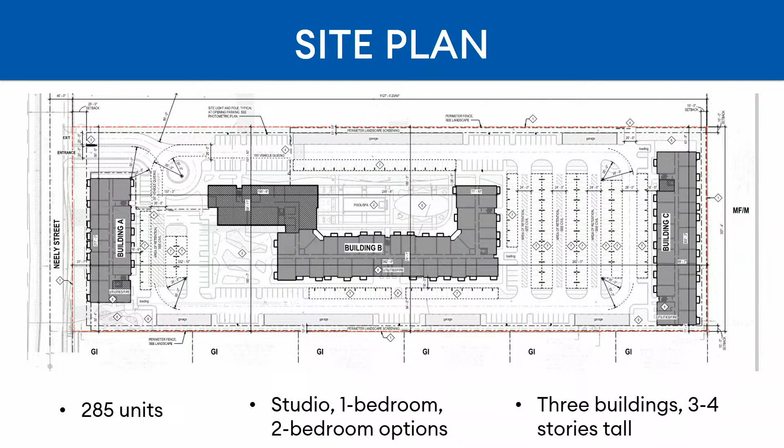The proposed emergency secondary access route is still being finalized, but as currently proposed will be placed at the northeast corner of the site and travel along the eastern boundary of the future town-owned property until it reaches Vaughn Avenue. From there, it will curve up and around the district lofts community and exit out onto Ash Street. This access point will be for emergency vehicles only and will likely only be utilized if Neely Street is blocked due to an emergency.

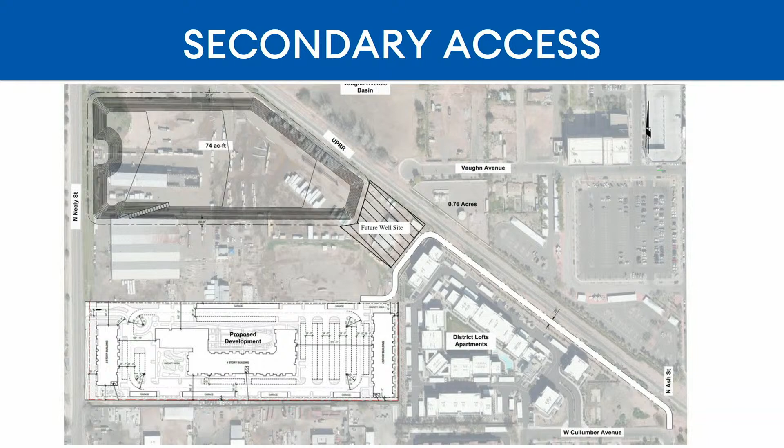The open space requirement for multifamily high is 40%, but a planned area development was approved in May, allowing the open space to be reduced to 35%. The applicant is currently proposing 35.3% open space.

Landscaping will include a buffer of trees along the perimeter of the site. The types of trees include, but are not limited to, ghost gum, fruitless olive, palo verde, evergreen elm, and southern live oak. Also found on site will be a variety of shrubs and ground cover, such as bluebells, Mexican honeysuckle, orange jubilee, pink oleander, lantana, deergrass, and red and blue yucca.

The buildings are designed in a modern aesthetic with materials complementary to the adjacent Heritage District. Staff does have a handful of concerns that affect all of the buildings. These concerns have already been discussed with the applicant, and they were received positively for the most part. As a summary, our first concern was the exposed downspouts that will need to be internalized.

Another concern regards the flat nature of the roofline. Staff has requested some variation in the roofline heights, but the applicant has expressed concern with modifying the roofline because the flat nature fits the more modern aesthetic look they're going for. We ask that if you have any specific feedback or suggestions on how to proceed with the roofline concerns, please provide that this evening.

The next general concern we have is about the balconies. As proposed, they look like an afterthought. We've requested that they be incorporated into the building design in a more thoughtful manner. The balconies will also need to be covered as required by the Land Development Code. Staff has suggested that perhaps some of them can be recessed into the building to assist with covering them and also provide some additional dimension to the buildings. The last concern we have is about the continuity of the materials, which I will touch on over the next few slides.

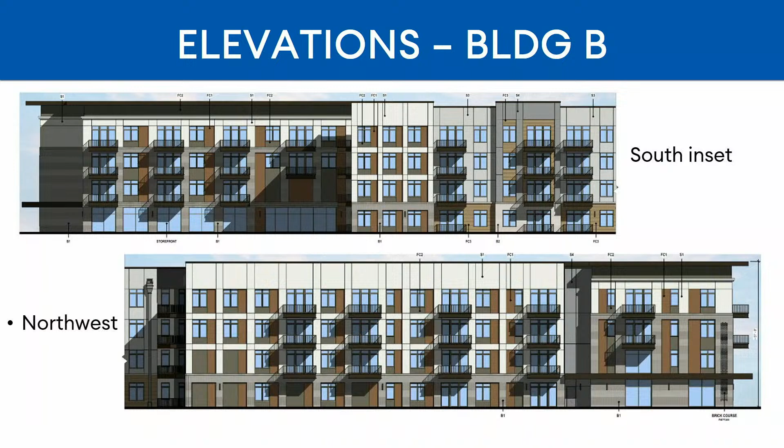These images show a closer look at the northwestern section of the building. The top pictures show the western portion of the south elevation, and the bottom shows the western portion of the north elevation. These are close-ups of the dotted areas here that are grayed out.

With the exception of the ground floor, staff has requested that the quality of the elevations be consistent and not to remove materials just because they face internal to the site. The north elevation will be seen every day by residents who live here and spend time at the pool and amenity areas. The building is also 4 stories tall, and those upper floors will be seen by neighboring areas.

Building C is the rearmost building adjacent to District Lofts. The use of brick has been eliminated almost completely on this building, and we have requested that additional colors and materials be added to the building so that it has the same character level as the other buildings on the site. This building directly faces the District Lofts community and should include more material variation so the neighboring properties aren't looking at 3 floors of stucco.

Right, and seen here are the end caps of that Building C, an image of the proposed garages found on the north and south sides of the property, and also an image of the proposed monument sign for the community.

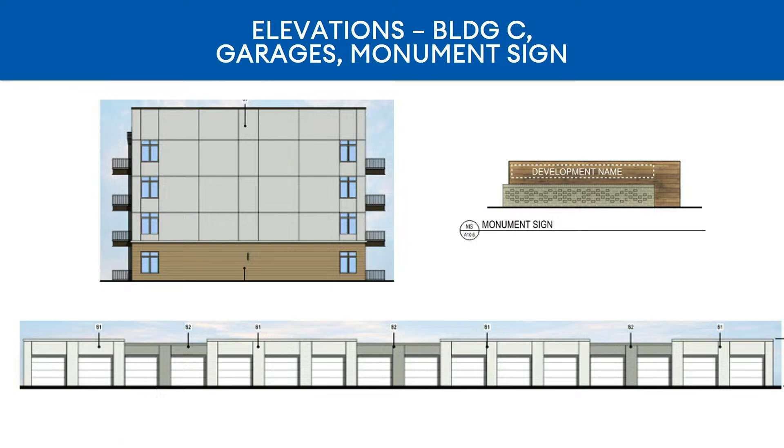Right, and these are just some images of Building A's floor plan. That's the building closest to Neely Street. The first floor is on the left and the second and third floor is on the right. You can see the entry points on the east elevation.

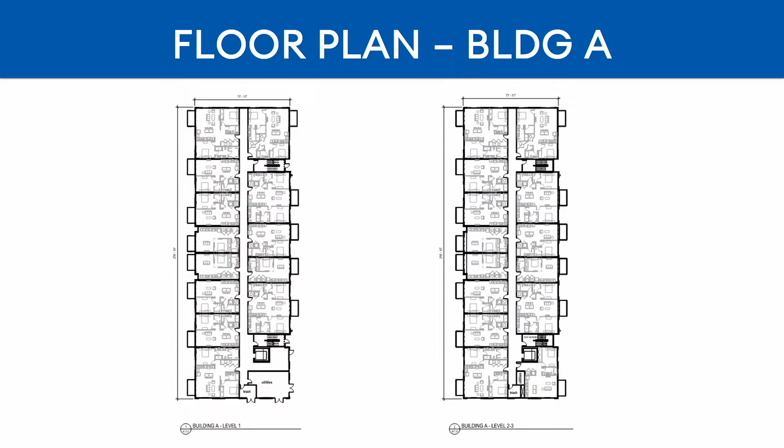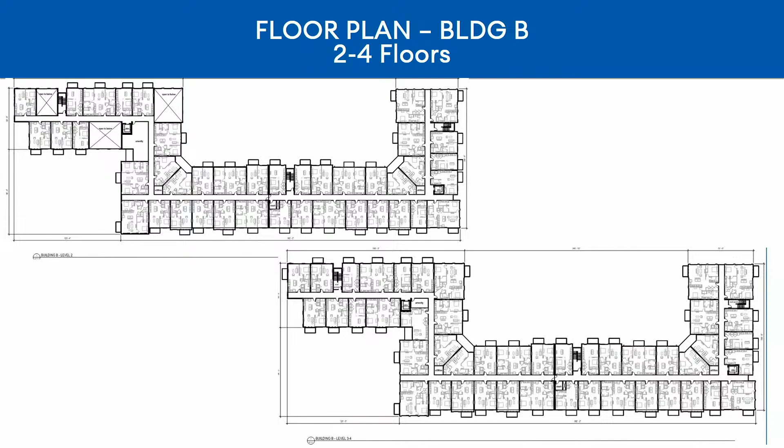This slide shows the floor plans for the upper levels of Building B, with the second floor being shown on the top and floors 3 and 4 on the bottom.

Lastly, I have a few snips of the proposed bedroom options. 20% of the units will be studios, 31% will be 2 bedrooms, and the remainder will be a mix of corner and standard 1-bedroom units.

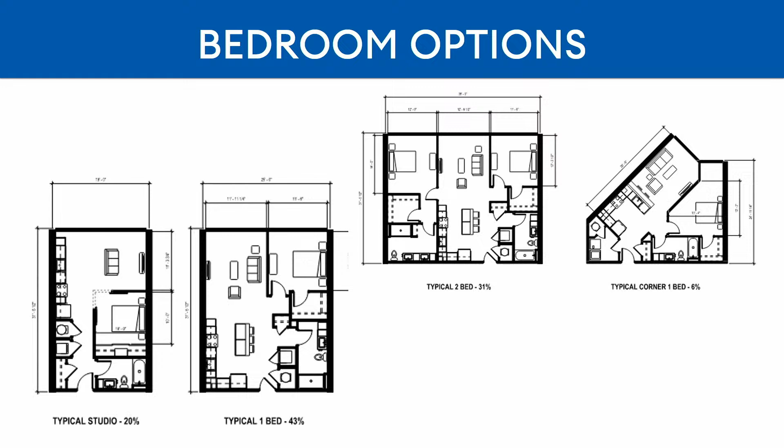And with that, I am seeking your input tonight on the elevations, including the roofline variation and any other general feedback that you would like to provide.

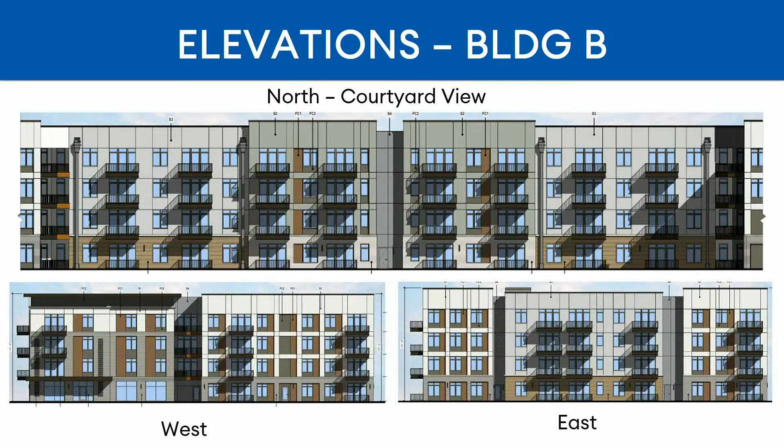Okay, so the concern is at the elevation, having that very consistent line. Yes. Thank you, okay, I understand. I was maybe too literal then with that.

So we're just looking for some more movement, possibly something to help it just not be so flat. Sure, yeah, and I think if you're also requesting variation in finishes and material and colors, I think there might be able to have some play there.

Bringing in different colors and keeping it the same could give it a different appearance, but if all of these conversations are kind of happening in tandem—yeah, I love lines and I love straight lines, so I don't have a concern with it.

Vice Chair Updike, we did take this to Planning Commission study session as well, and I'm sorry I didn't include a slide on their feedback, I should have. But they were kind of on the fence about the roofline as well. The roofline concern is coming more from a staff perspective. Planning Commission weren't overly concerned with the way the building roofline looks currently.

Okay, all right, thank you, Vice Chair Updike. Commissioner Bigelow or Commissioner Clausen, do you have any questions or comments?

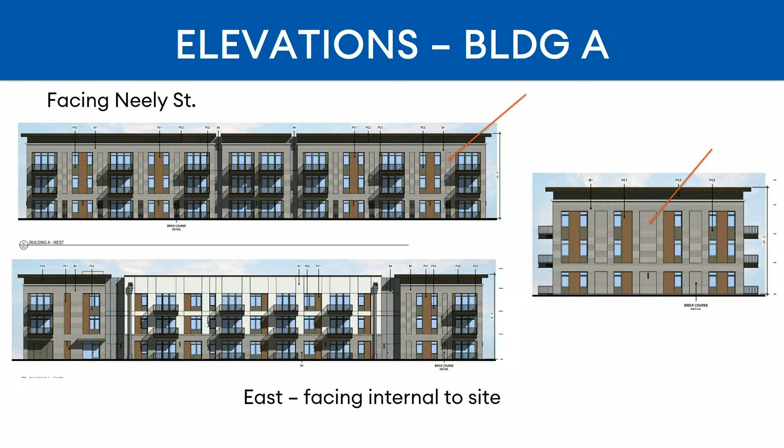Yeah, I think. And then, so in addition to the patios, can you go to the detail on some of the finishes, the detailed finish sample?

Oops. This one? Yeah, perfect. That's kind of what I was wanting to look at.

Fiber cement panels go both horizontally and vertically in some locations. Got it. Yeah, I think as a rule of thumb...

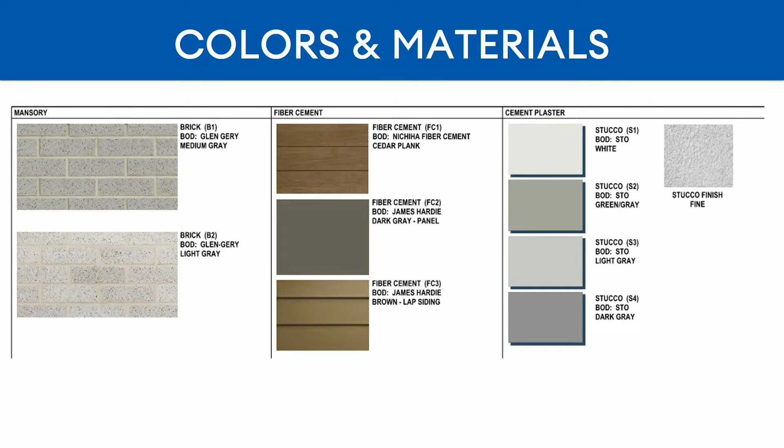I do think it comes across a bit uninteresting, and I can't necessarily put my finger on it, but I do think the patios are a big part of it. I'd love to see some shade structure over the patio spaces. As you had said, it could be created naturally by setting it back into the building, or it could be done in an interesting way with eyebrows or awnings.

Don't get me wrong, not like a fabric material, more of a permanent awning, a stainless or steel structure, not a fabric structure, but eyebrows - interesting features that could be added to add shade.

I think it'd be great to see maybe a little bit more iron and glass on the building. And then, with some changes, I am far less concerned about the horizontal nature of the roof line.

Great, thank you. Thank you, Commissioner Clausen. Commissioner Bigelow, do you have any comments or questions? Yeah, I do. So I also appreciate this study session being strictly on the design of it, because I feel like that is kind of what our job is.

And just to make sure that things are consistent within the district and the surrounding buildings, I think we could maybe solve a few of these problems at the same time.

It is kind of a lot, but if you could go to the elevation titled General Elevation, where it has the concerns - this one's perfect. So right here, you said 210 feet is the length of this, and this is what's going to be facing Neely in the top left, is that correct? Correct. So it's approximately 200, 220-ish, somewhere right around there.

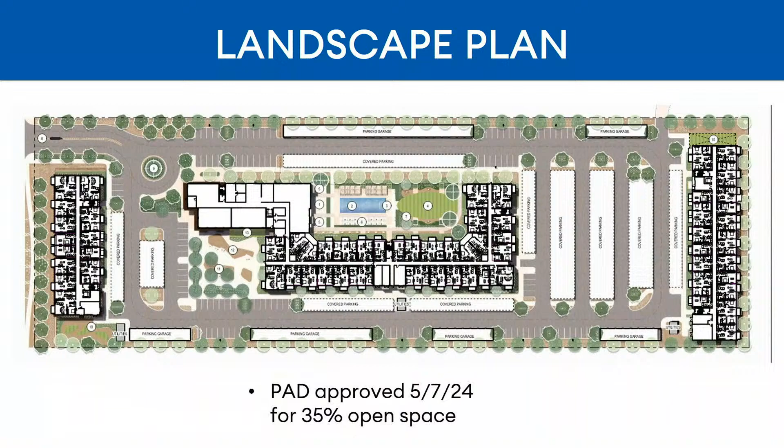Okay, I don't think I have any further questions. Any commissioners have any further questions or comments?

Yeah, I've got one. Just to echo Commissioner Bigelow, I think they could do something unique in between the downspouts there that could address the roof line. But I would also like to see, speaking of District Lofts, if you look at that project, the multiple buildings they have there, some of those buildings have a completely unique identity from the building immediately next to it. I think in addition to doing something in between those downspouts to set off the roof line, you could completely change the material and facade of that center section, and it will visually almost appear as three separate buildings.

Giving it just a more interesting curb appeal, so your eye doesn't just look left to right, horizontally, and say the exact same scheme. I think you could, in a unique way, help solve the solution on, as staff has recommended, putting those downspouts internal, refacading that centerpiece, if you will, of that building, which could be a theme throughout the project. That could also help solve the solution of putting those downspouts internal. But setting off that center section, I think, could go a long way, in addition to Commissioner Bigelow's idea on the roof line.

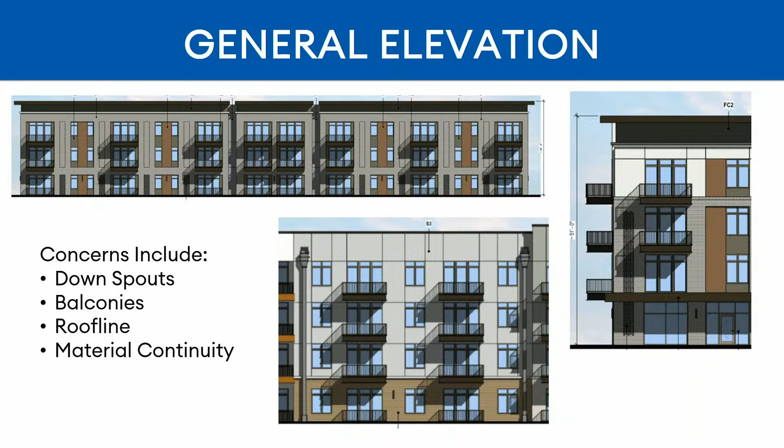And Commissioner Clausen, I agree with you, and talking about that made me think of Hale Theatre and what a fabulous job they did for it, being one building and one use, but making it look multi-dimensional using different materials. I really don't have a problem with the smooth stucco. I know the reason they want to use it is because it's significantly cheaper than brick, block, and siding. But I feel like if they come with a really good design to make it look more broken up and more like separate buildings, even though on the interior they're identical, having it broken up that way could make sense to implement block, brick, and stucco into the project. But just having the whole outside all the same, with a bunch of balconies and windows, almost like cookie cutters, just copying and pasting, doesn't look as good as I feel it should or could. So, completely agree. That's my point.

Again, this is DR 23-109. This is an amendment to the original case, DR 20-48. As you know, this project is located at the southwest corner of Juniper Avenue and Gilbert Road at the north end of our Heritage District. We call this our North Anchor site, also Heritage Park or Heritage North, so you may have heard it by any of those names. Just by way of background, the total site is 11.97 gross acres or 9.9 net acres.

It was originally approved by the Redevelopment Commission in February of 2022. Since that time, there's been some additional activity and work that the applicant has been doing with staff, working with SRP. And back in April of 2024, Town Council approved an amendment to their PAD that allowed the development to be constructed in phases.

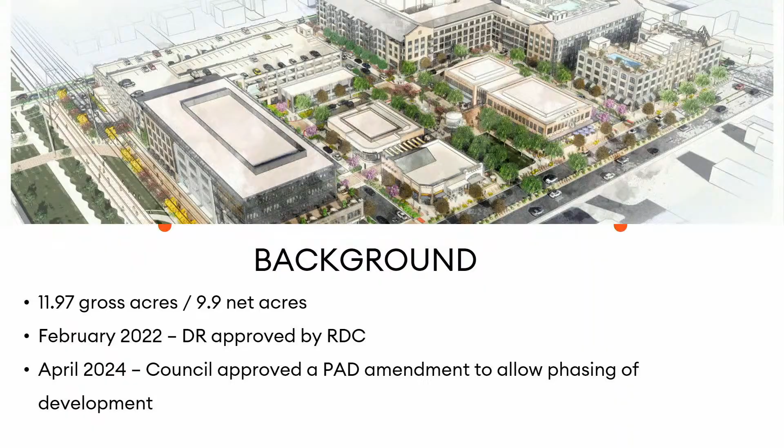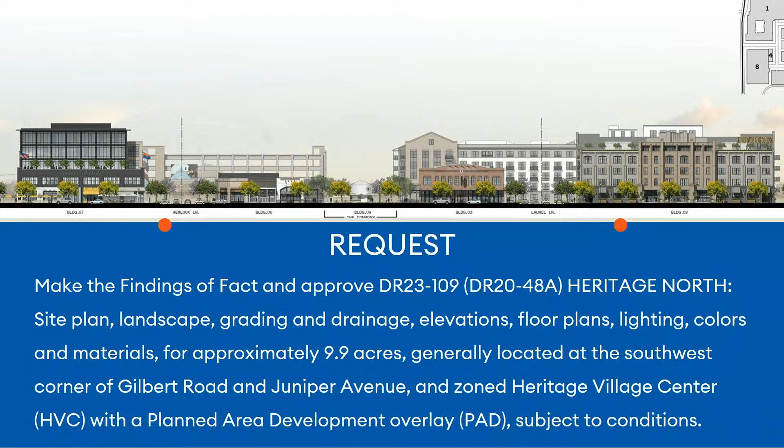So that's what we're here before you tonight to present, that phasing plan, because that is a departure from what you had previously seen, which anticipated that it would be constructed in a single phase. So tonight we're asking the Redevelopment Commission to approve DR 23-109, which will allow phasing of this development, as well as a couple other modifications that I'll cover throughout the presentation.

Just to reorient you to the site plan, this is the master site plan and what the site will look like at full build out. There are a total of 9 buildings. It includes the commons open space at the center of the site, the full construction of Water Tower Way through the site, and improvements to the Western Power Line Trail.

Just to quickly run through the buildings: the large building at the northwest corner of the site is the multifamily building, which wraps a parking garage that will serve those multifamily residents. Building 2, at the hard corner of the intersection, is the hotel building. Building 3 is a 2-story retail office building. Buildings 4, 5, and 6 at the center of the site are additional retail buildings that are single story. Building 7, at the very south end of the site on the eastern side against Gilbert Road, is a multi-story office building with retail on the bottom. Building 8 is that parking garage, and at the center of the site there's a small kiosk as part of the commons open space.

So this is full build out of the site. It includes those 2 parking garages as I mentioned.

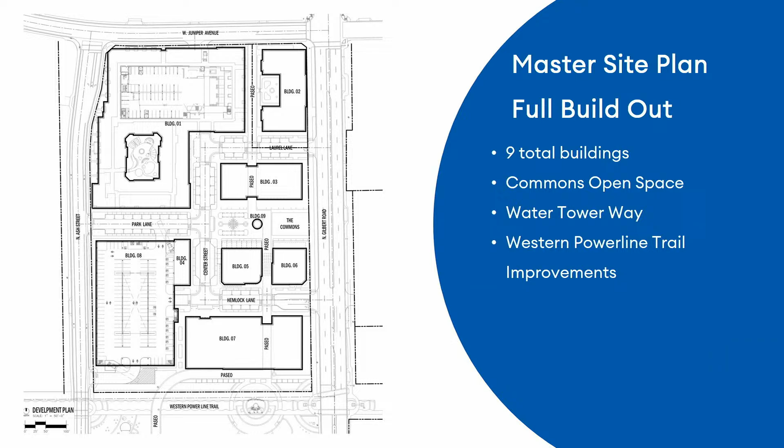What the applicant received approval for, their PAD amendment included this proposal that would allow phasing of the site. So it includes construction of the multifamily building, including that multifamily garage, buildings 3, 5, and 6, the commons open space, Water Tower Way throughout the site, building 9, and then the most significant change you'll see on this plan compared to the last is that surface parking lot. This is anticipated to be a temporary surface parking lot while they work towards build out of those sites, and then the next piece that would be built is that office building and the second parking garage.

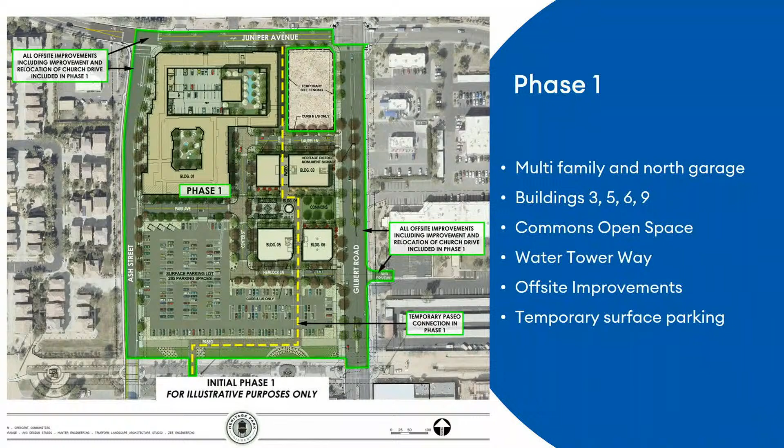The hotel, it's important to note, could come in sooner along with phase 1, just depending on finding a user for that site. So phase 2 would then round out the construction of the site with building 4, building 7, that office building, and then the south parking garage.

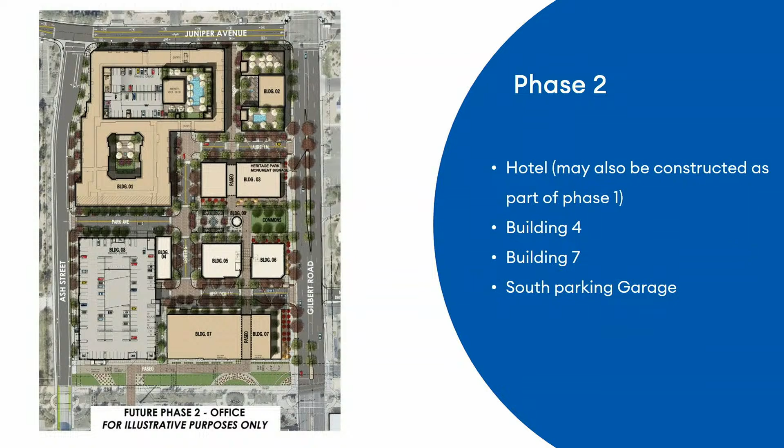It's important to talk a little bit about parking. There are no changes to the overall parking of the site at full build out. Per the previously approved design review and their parking AUP, they're required to provide 1,272 spaces, and they will still meet that requirement at full build out. For phase 1, for all of the uses they're building, they're required to provide 645 spaces. The surface lot will bring them to 782, so they will be meeting the parking requirement for that initial phase.

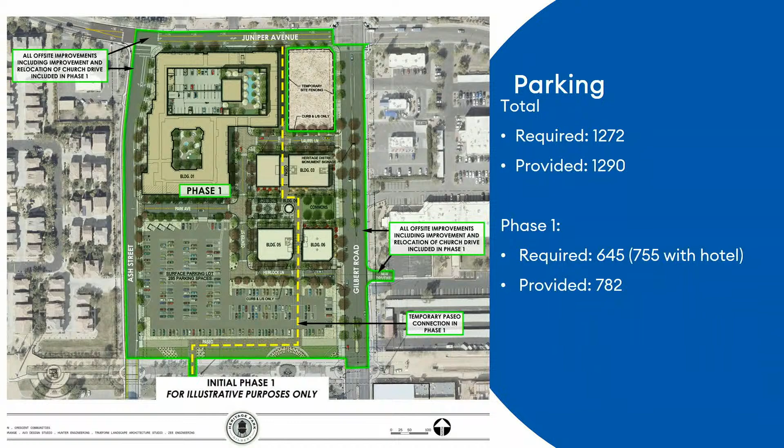I also wanted to talk about a couple of the changes you've seen in your packet regarding the elevations. Had these come in on their own, they likely would have been processed as administrative applications, but because we had this one to bring to you to talk about phasing, we've included them in your packet as well for consideration. Building 3 is that 2-story building that I talked about.

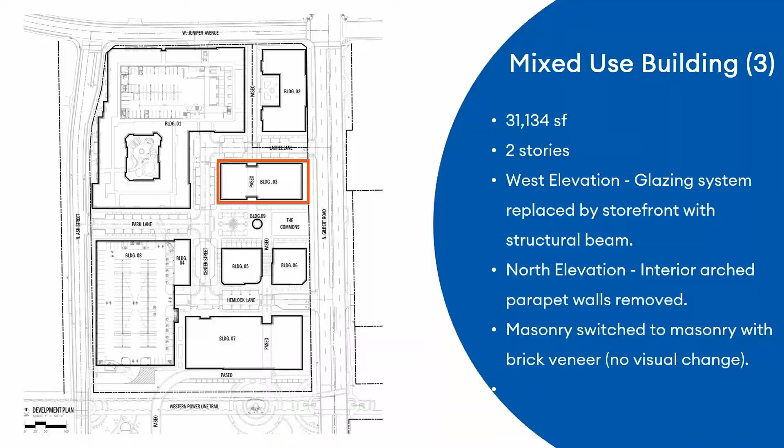It's 31,000 square feet, no change to that 2-story building. What they've changed is some of the glazing systems—they've replaced some of those with a structural beam. On the north elevation, they had an interior arch parapet wall that was removed, and they changed some of the masonry to masonry veneer. So these look very, very similar to what you had seen previously, but we wanted you to take a look at those.

The materials, again, the only change is swapping out that masonry brick to a brick veneer.

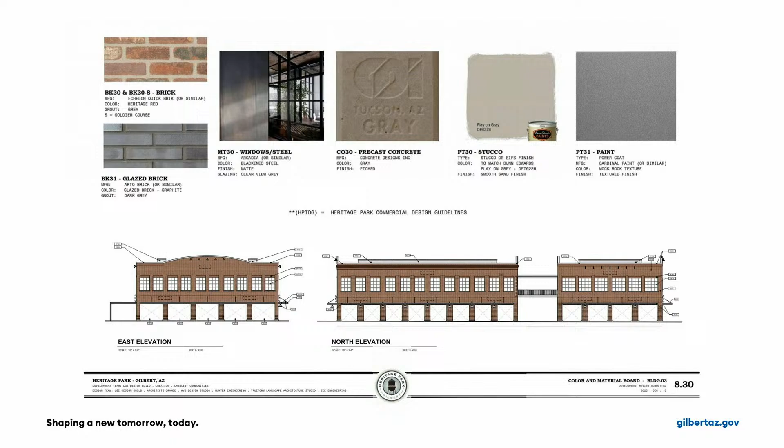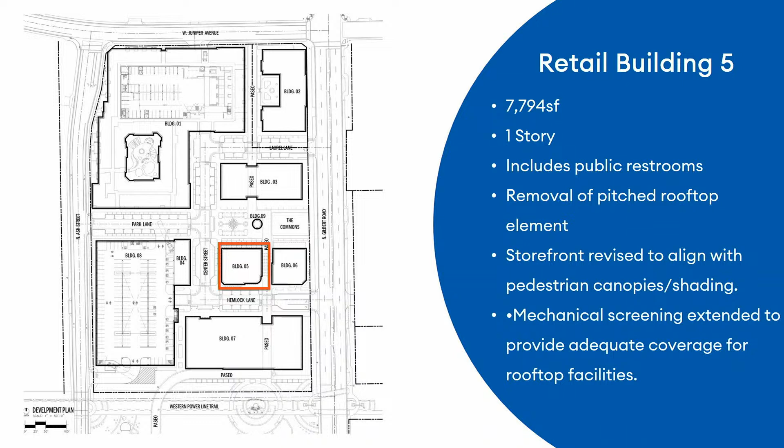With retail building number 5, this one is more central to the site. This is a 7,700 square foot single-story building that includes the public restrooms, which will still be part of this structure. They did remove the pitched roof element with these elevations, modified the storefront to better align with the pedestrian environment, and brought the canopies down a little bit lower. They also extended the mechanical screening. So these are the new elevations for that building—looks very similar to the original approval.

And then with retail building 6, this is a 6,700 square foot building, single story. Again, they made some of those similar revisions to the storefronts to align the canopies better for pedestrians. On the west elevation, they updated the electrical service room, and then updated the pedestrian canopy on the southern facade of this building.

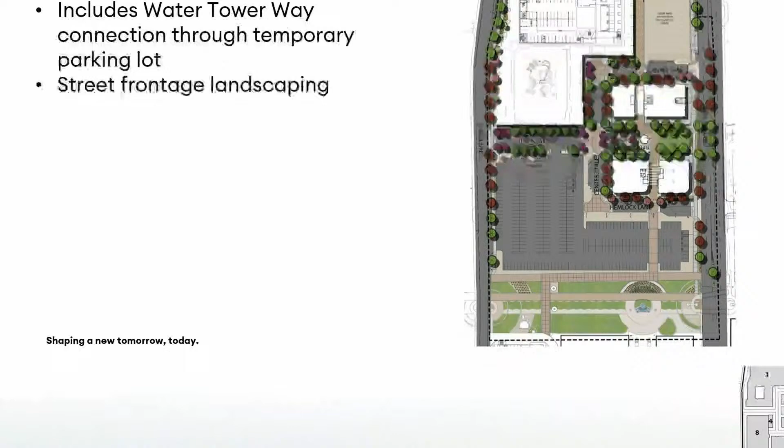Staff is happy to answer any questions you have about this application. Staff does recommend approval.

I'm sorry, Sydney. You are welcome to ask the applicant any questions—they're here tonight as well. And then there are the two use permit applications that accompany this as well. So if you'd like to make your decision on this one, you can, or I can roll right into the use permits.

Thank you, Ashley. Any commissioners have questions for staff?

I do, because I think approving this kind of goes hand in hand with the special use permits. I just wanted to know if SRP was the only major holdup between now and this project being approved back in February 2022. Just to make sure I understand that question, are you asking if the delay was primarily the work the applicant needed to do with SRP? Yes. The applicant may be able to shed some additional light on that, but that was a big hurdle the applicant needed to work through—coming to resolution with SRP on what they could and could not do within that easement. I don't know if there are some additional factors they may know of, but that was a big hurdle.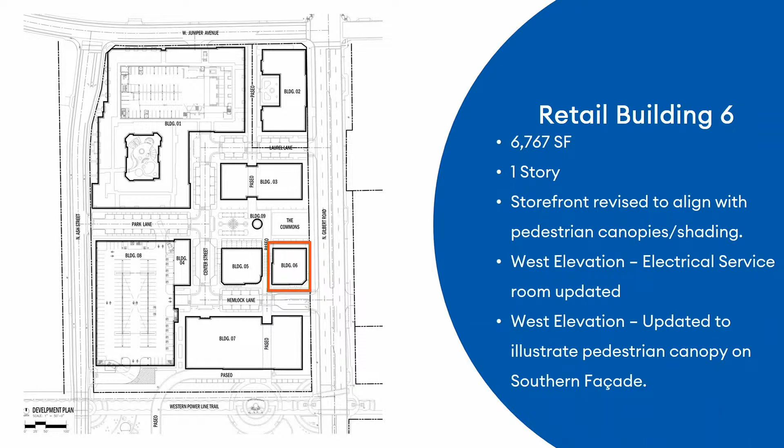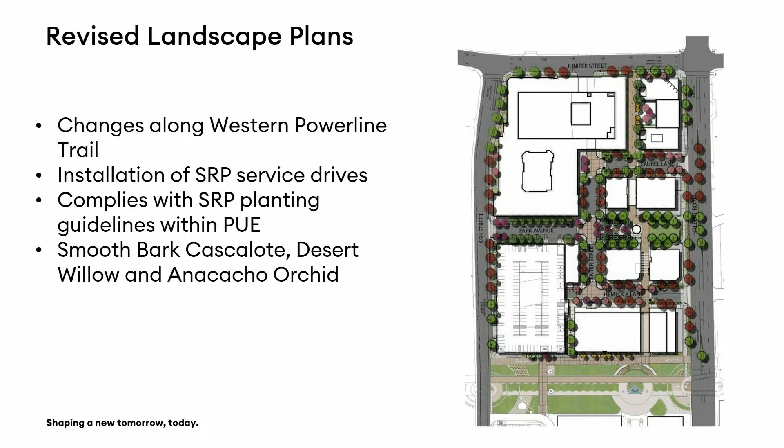And so if we go back to one of the last slides, it looked like the Paseo was actually cutting through the parking lot. Chairman, as part of phase 1, it does, because it was important to staff to ensure that connection, even through the phase 1 development where there was the temporary surface lot, that Paseo connection was still made. So in phase 1, it goes through the parking lot. At full build out, building 7 has a pass-through on the first floor, and the other stories are above it. I actually have a lot of extra sheets in here.

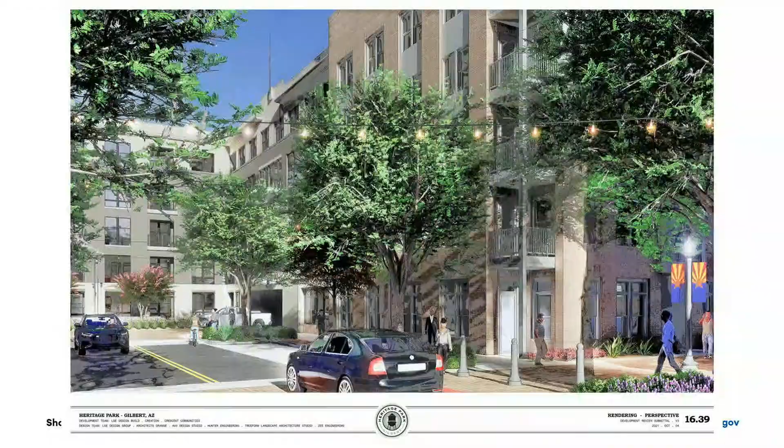So here you can see it kind of passes through the building. Sure, but this is where it passes through building 7. So in phase 1, yes, it goes through the parking lot. Phase 2, it goes through building 7. Okay.

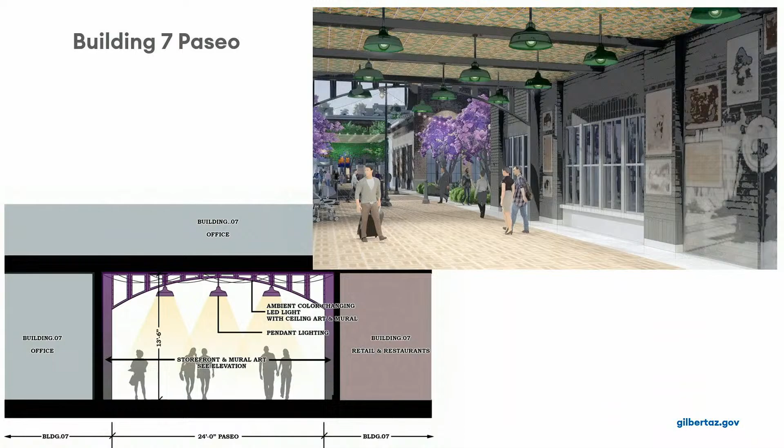During phase 2, all of that parking will go away. Where do hotel patrons park, and where will retail and office park during construction? Correct, Chairman, that is a good question, and one that staff was concerned about as well. So they will phase construction of phase 2 as well. They will have to build the parking garage first, and so half of that surface lot will be under construction at some point, which will leave the site with a deficit of 164 parking stalls during construction.

So we have relayed to the applicant that they will be required to apply for an AUP. The district may be able to absorb some of that parking just through that process that we typically have for that temporary period. But we would also look for them to investigate some alternative solutions for that as well. So where else might they be able to have some temporary parking? That will be an application that we review when we reach that point, one for the AUP to see if we can allow some of the district parking to absorb that. But we do acknowledge that there will be a 164 space deficit during that construction period that we would ask the applicant to seek an alternative solution for.

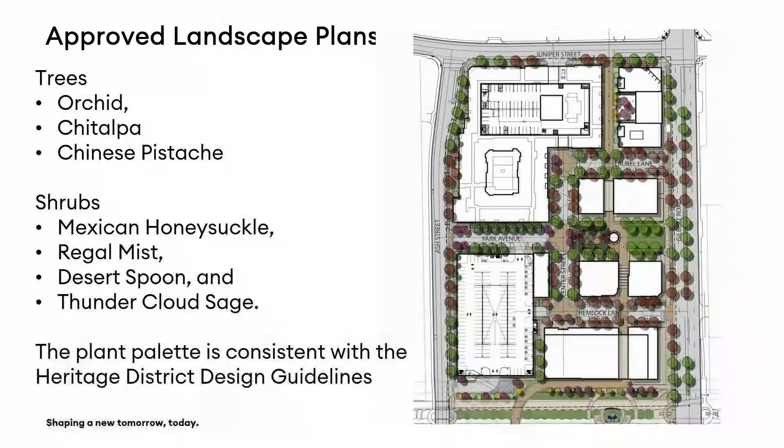If we could go back to the overall aerial of the flat surface parking and the buildings. This one? Yes. So if I understand you correctly, where the flat surface, where the majority of that flat surface, where we refer to as building 8, that will be built first in phase 2, and then building, I don't know, is that 5? Building 7. Building 7 will be built second. So there's a configuration in which cars will be diverted to park into the smaller area? Correct, where the Paseo is cutting through.

Okay, I don't have any further questions. Do you have any additional questions? Commissioner Bigelow, do you have any further questions?

I'm just looking through the agenda item and looking at the items that are expiring that need to be extended, and seeing, is there any kind of set timeline on how long, within 6 months to a year, they predict phase 1 will take, and then how long after phase 2 will take?

So I can certainly pull up the development agreement, but the applicant might have better information relative to when they actually anticipate that start of construction and then how long those phases are. The development agreement is a little bit more broad in that, but I do know that there are portions that would be complete. The multifamily has a longer build time than some of those smaller buildings, but off the top of my head, I believe they're the spring of '26. We were anticipating some of those, but again, the applicant probably has a better handle on more accurate dates.

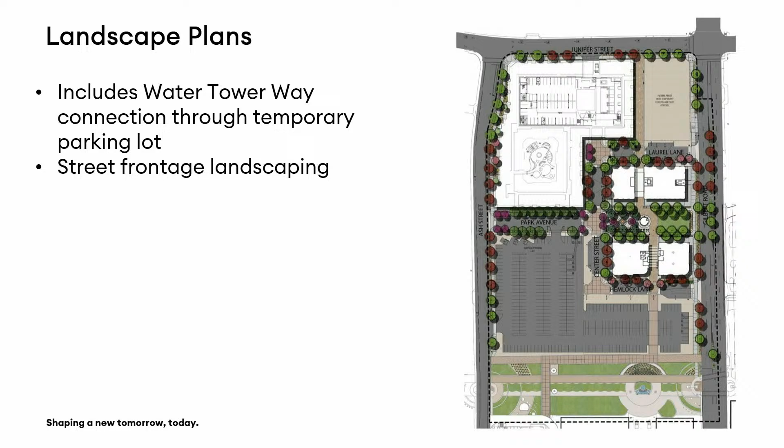And just so I understand, Ashley, if come spring of 2026 they're not ready and they need an extra few months, not a big deal. But what if it takes 4 or 5 years for them to begin phase 2? What happens in that situation? I don't know how that works.

So I'm probably not the best person to answer that question. We can probably have some internal conversation. I don't know what the remedy is per the development agreement off the top of my head. Okay, thank you.

Any additional questions? Would the applicant like to speak at this time?

Good evening, commissioners, and I think good morning to one commission member. It might be a first for the RDC. My name is Alex Hayes, 2525 East Arizona Biltmore Circle.

Here before you tonight with Heritage North. I know this is a project we're all very familiar with, and it's been before this body a number of times, so I don't have much more to add beyond what Ashley has. In the interest of time, I'll skip the presentation—it's nothing you haven't already seen. The request tonight, in addition to the minor revisions Ashley mentioned, is really just the phasing plan, which formalizes as part of the DR the same phasing plan this body recommended approval of as part of our PAD amendment that was ultimately approved by Town Council a couple months ago. Happy to answer any additional questions.

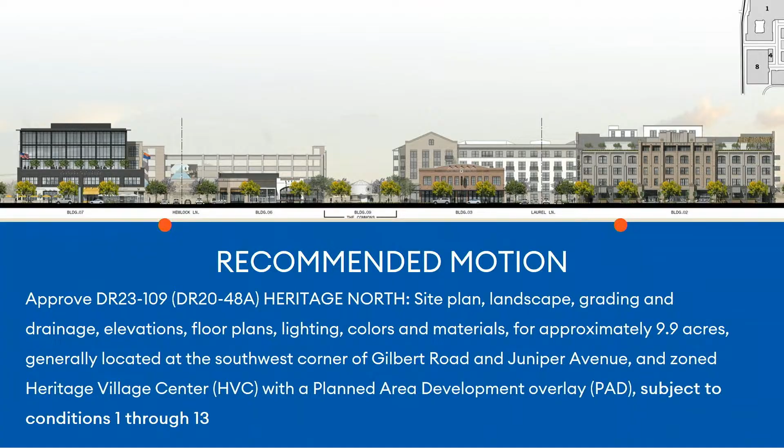Do you mind if I add something in there with UP 23-44 Heritage North? Just to refresh my memory on this.

The ground floor was originally residential, but then they wanted to change it to commercial because of the amount of glass required for the first floor. But this is saying that we would still allow it to be residential.

Commissioners, I will actually go through presentations on the use permits next. Right now we're just talking about the design review, but to answer that question as it relates to the design review application, they received a deviation as part of their PAD originally, I believe, to reduce the amount of transparency required on the ground floor of the residential building.

So the residential portion, the use permit, does allow ground floor residential, and the transparency issue was handled as part of the PAD. Gotcha, thank you.

I will now close public hearing on DR 23-09 Heritage North, and we'll look for the commission for discussion. Who would like to share their thoughts first? DR 23-109, thank you. Would you like to start, Vice Chair Updike? I don't really have any additional comments, so appreciate the discussion, but I don't have anything else.

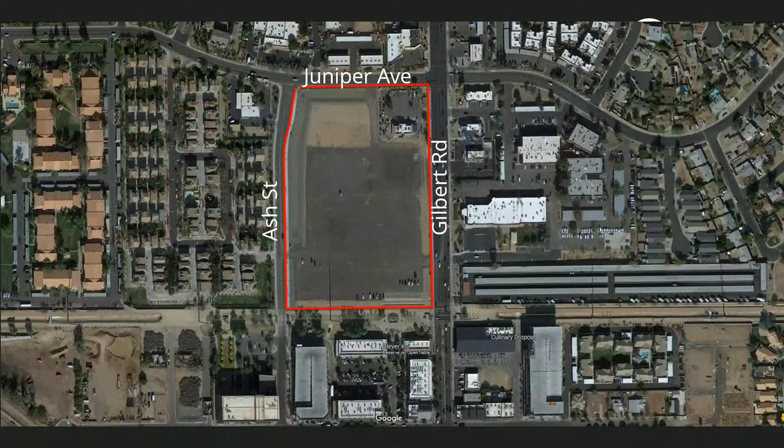Thank you, Chairman and Commissioners. As you mentioned, this is UP 2344 and UP 2345. Again, the same site located at the southwest corner of Juniper Avenue and Gilbert Road, within our Heritage District. This is on 9.9 net acres. By way of background, this was approved in January of 2022.

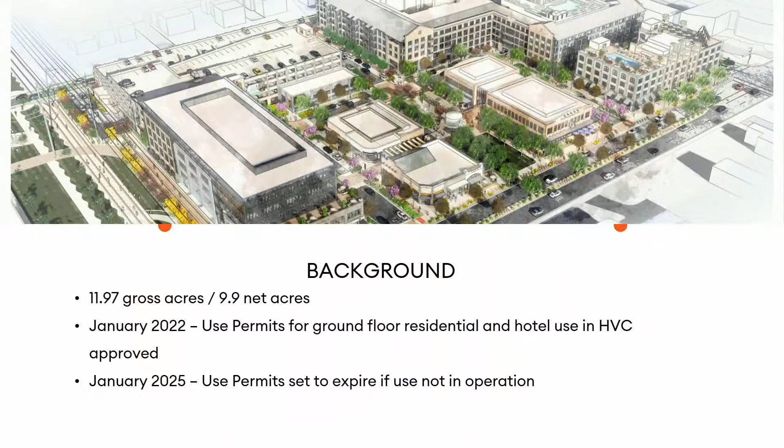It was for both ground floor residential uses as well as a hotel in the Heritage District. Use permits per the Land Development Code are good for 3 years unless the use has commenced, and so these are set to expire in January of 2025. We know that the construction period for these will be longer than that, so we're here before you tonight essentially to ask for an extension of those.

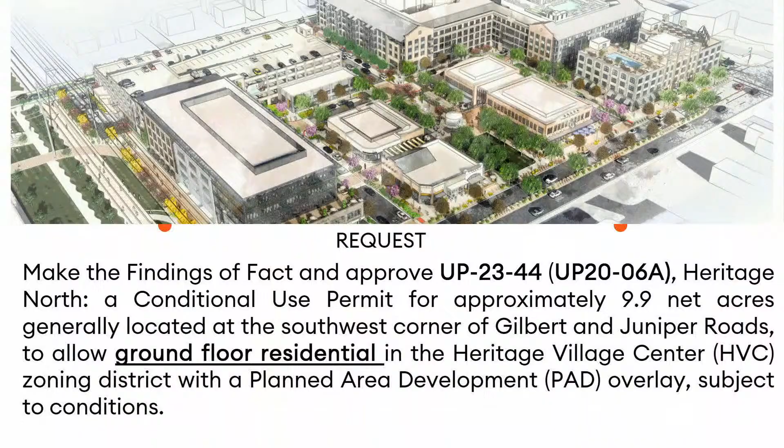So again, the two items: UP 2344 is the conditional use permit to allow ground floor residential in the HVC zoning district, and UP 2345 is to allow a hotel in the HVC zoning district. To orient the Commission again to the location of these two, Building 1, located at the northwest corner of the site, is that multifamily building that will include the ground floor residential. Building 2 is the hotel site.

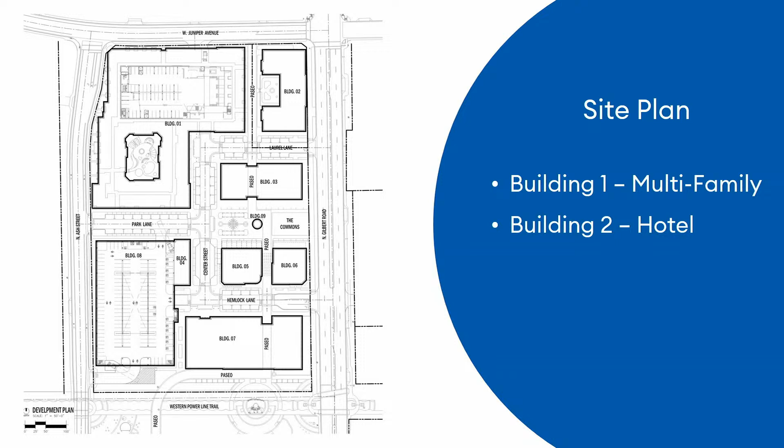It's important to note there are no changes as part of this application. It is simply just to request an extension of that. When we require use permits, these are items that just essentially require special consideration so that we can evaluate any adverse impacts that they may cause on the surrounding area.

And so with that, there are 4 findings of fact that the Commission must make to approve these types of applications: that it can't be detrimental to the health, safety, general welfare of those living or working in the area; that it conforms to the intent and policies of the general plan or any other applicable plan such as the redevelopment plan; that it conforms to conditions and requirements of the zoning code; and that it wouldn't interfere with the use of enjoyment of nearby properties.

The ground floor residential component has 288 units. This is in compliance with the approved development agreement that requires a total of 250 units within that residential building. The residential units with patios are oriented towards Juniper and Ash, so there is still going to be a pedestrian-friendly environment along those roadways. Staff, through the original entitlement process, worked with the applicant to ensure that the ground floor amenity areas were oriented towards the center of the site, so you still felt that activity that we would normally get from a non-residential use on the ground floor.

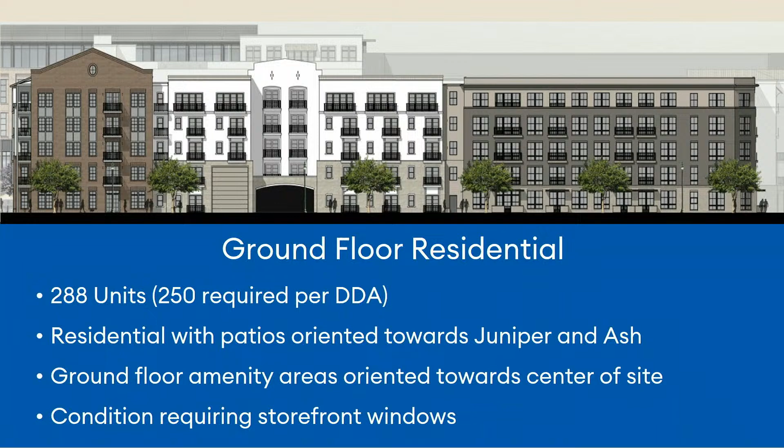We added a condition as part of the original approval that's being maintained as part of this extension request that requires storefront windows at their fitness center. There's a coffee shop on the ground floor to still activate that ground floor.

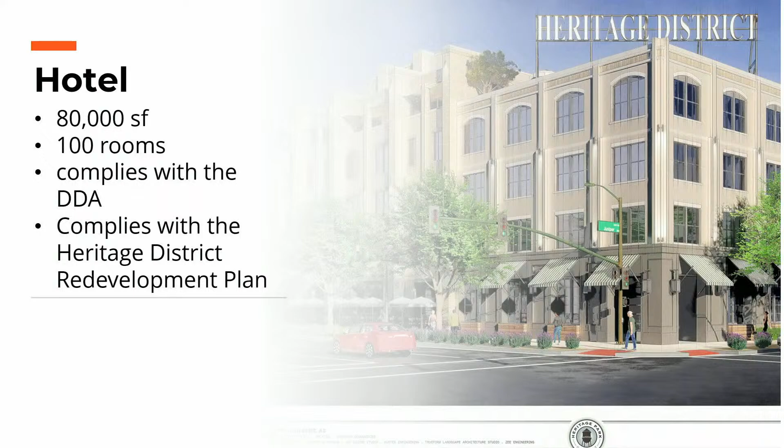With the hotel, it's an 80,000 square foot, 100-room hotel, which is in compliance with the approved development agreement. The Heritage District redevelopment plan includes on this site the notion that a hotel would be developed here, so this is certainly in conformance with that specific plan. Staff would recommend approval of both of these use permits, or the extension of both of these use permits. So keeping this one short and sweet, if you have any questions for me, I'm happy to answer them.

Commissioners, do we have any questions for Ashley? Hearing none, would the applicant like to speak? Oh, Commissioner Bigelow?

Just going back to the ground floor retail, I know this is to extend it, but in my mind, I'm just thinking that we need as much retail as possible. Are we sure that having a gym, showing glass, and a coffee shop is enough or sufficient for what the town wants and needs along that retail, along Juniper and Ash?

Chairman and Commissioners, staff is satisfied with the amount of commercial that they have provided on site through their other buildings, and is comfortable with this application. Okay, thank you.

Vice Chair Updike? Would the applicant like to speak? Staff, are there any members of the public in attendance who wish to speak on UP 23-44 Heritage North Ground Floor Residential or UP 23-45 Heritage North Hotel? Mr. Chairman, there are no requests to speak on those items.

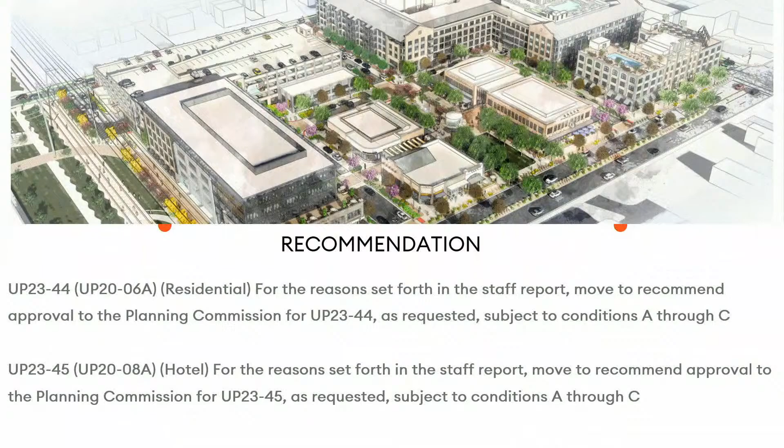Perfect. Commissioner Bigelow, how do you vote? Approved. Vice Chair Updike? Approved. And I approve as well. Thank you very much.

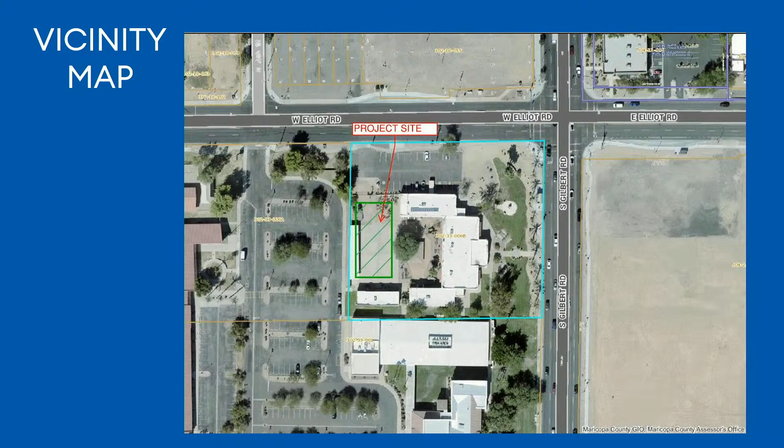This is located at the southwest corner of Gilbert Road and Elliott. We know this as the Gilbert Historical Museum. There's the existing building, which you can see on the site here, and where that green box is, is where the expansion of this project is intended to go. This is on a total of 2.2 acres, zoned public facilities and infrastructure.

The existing building on the east side of the property is roughly 13,000 square feet, along with some storage buildings. They're looking at doing a 6,200 square foot expansion for event space and conference room, a multi-purpose building. One thing to point out about the site: they are making improvements to the parking lot in terms of restriping it and adding a refuse enclosure.

The bulk of their parking is through a shared parking agreement with Gilbert Public Schools on the adjacent property. Just south of this site is the district office for Gilbert Public Schools, and to the west is Gilbert Elementary School. So they have 90 off-site parking spaces at those facilities per that agreement.

In terms of the landscape plan, there will be some improvements to the property along Elliott Road with additional plantings, but the bulk of the improvements occur within that courtyard space to really help enliven that area as they have different events. There are additional trees that will be planted between the site as well as between the site and the Gilbert Public Schools facility to the west.

This does comply with the Heritage District design guidelines along those street frontages. However, you'll note in my staff report that I pointed out some of the plantings within the courtyard that are not visible to the public are not on that plant palette. Again, those won't be visible to the public. The site complies with open space requirements with 42% open space overall.

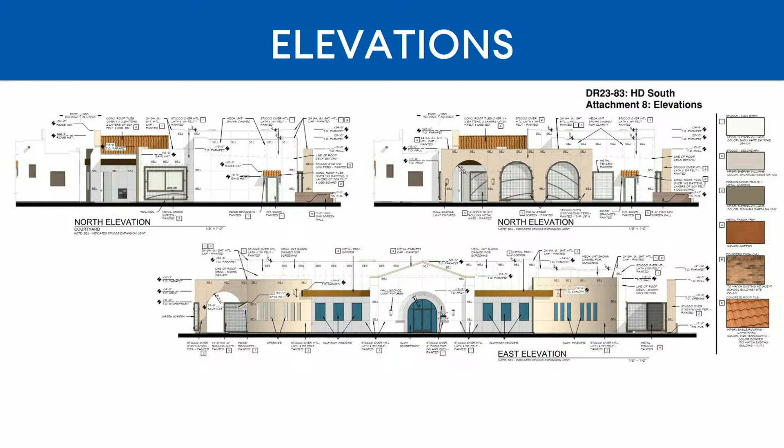In terms of the elevations, the intent is not necessarily to match the existing architecture, but to complement it. You see that through some of the arches that they've provided, the mission style architecture. On the bottom, that east elevation is from inside the courtyard looking at that new building structure.

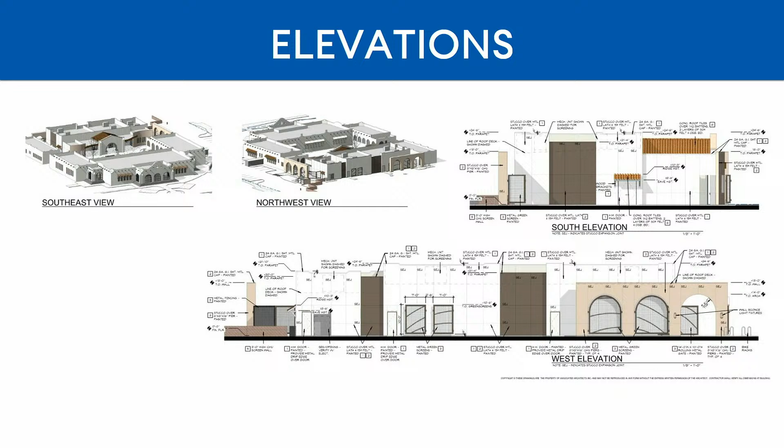And then these are the elevations. The south elevation will face an existing structure on site, and the west elevation at the bottom of the screen will face the district, the school site to the west.

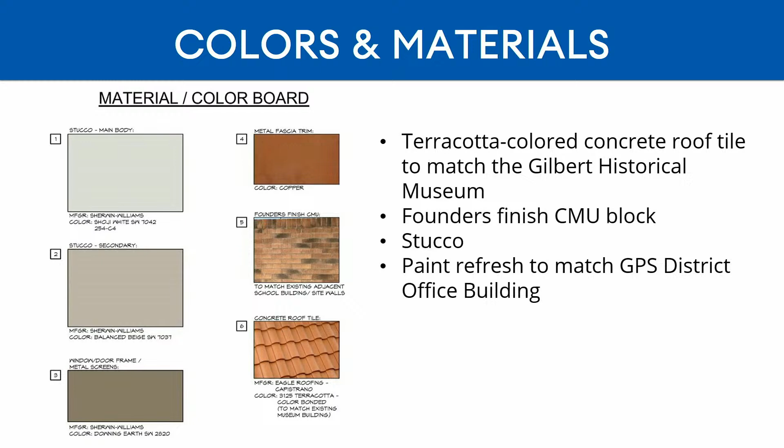In terms of colors and materials, they are proposing terracotta colored concrete roof tile that matches the existing tiles. There's a CMU wall around the property that is Founders Finish CMU block, matching the school district as well. It's largely made of stucco, consistent with that mission style architecture. There will be a paint refresh to both the existing building and this new addition that will match the Gilbert Public Schools district office building.

One thing I intended to mention at the outset: this application received its initial approval in 2019. Similar to use permits, design review applications have an approval that lasts for 3 years, and these approvals have expired. The applicant is here tonight looking to reaffirm the approval that expired in May of 2022. They are now looking to move forward, with construction drawings submitted to the town, intending to begin working on this addition as soon as they get this approval and building permits issued.

So happy to answer any questions that you have. We have the applicant team here as well. Thank you, Ashley. Are there any questions from the commissioners?

It may be more of a comment, but some time ago I pulled a lot of weeds on this property, part of Class 20 Gilbert Leadership. We planted a lot of plants, and I don't think any of them are alive. No, there are some of them. I can appreciate as a nonprofit, the limited resources in maintaining landscaping.

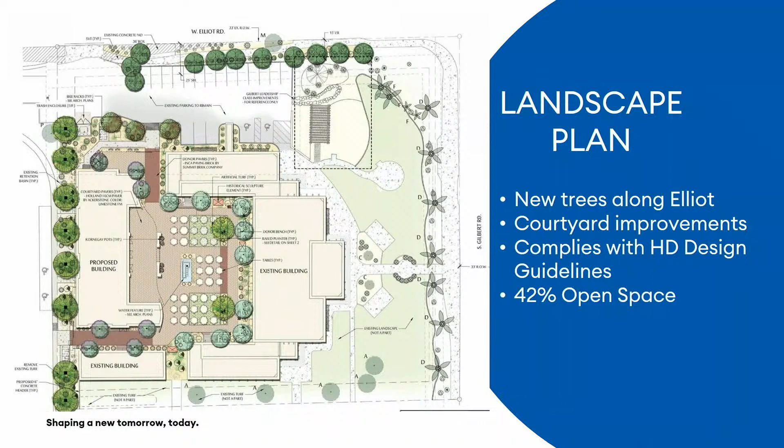Thank you, Commissioner Baugh. Any other questions or comments from commissioners?

Can you go back to the slide that talked about the zoning of it? Or this one, yes, thank you. Okay, let me have a second. Okay, I think I answered my own question, so thank you. Thank you for presenting.

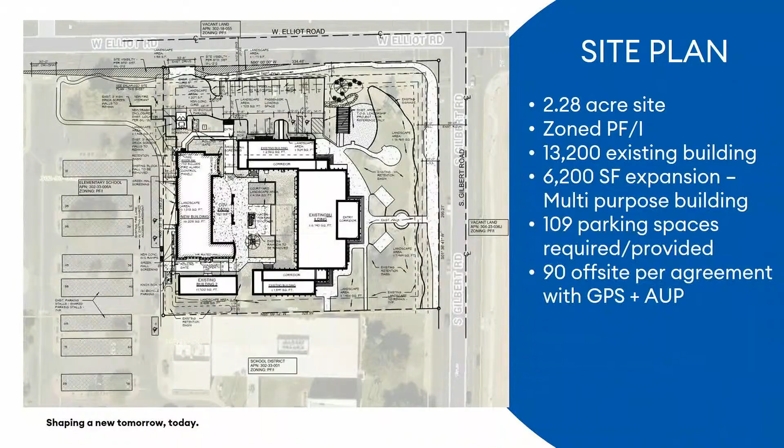Commissioner Clausen, do you have any comments or questions? I do not. I think it'll be a beautiful addition.

Commissioner Bigelow? Nope, I agree with Clausen. I think it'll be great to have a refresh on it. It'll be great, and it'll mirror the beauty of the school district building right next door to it. So I think it'll be great.

I agree, I'm really excited for it. I do have one question - when it comes to parking, is it shared parking with Gilbert Public Schools? Chairman, that's correct. Okay.

Would the applicant like to speak at this time? No? Staff, are there any members of the public in attendance who wish to speak on item DR 23-83? Mr. Chairman, we have no request to speak on this item. Perfect. Any additional questions for staff? Hearing none, I will close the public hearing on item DR 23-83.

HD South, and we'll look for the commission for discussion. Who'd like to share their thoughts? Nothing more to add. All right, at this time I will look for the commissioners for a motion.

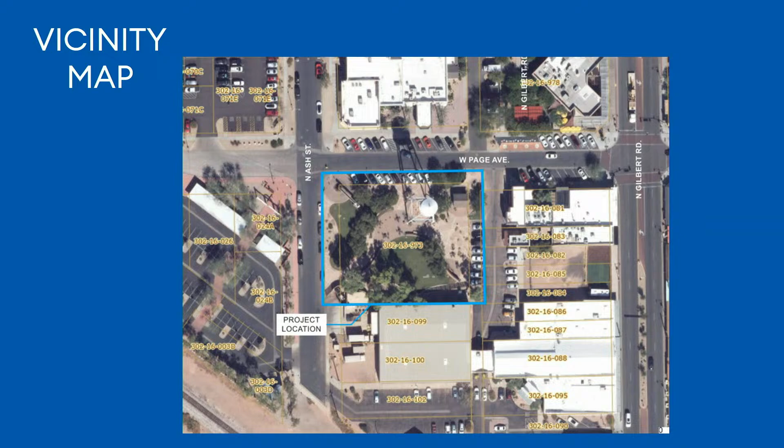The project is requesting two deviations from the approved landscaping found within the design guidelines. The first is for the inclusion of 5 ghost gum trees. Before the renovation, there were ghost gum trees on the site that were unable to be salvaged, so installing 5 new ones is a way to integrate the species back into the project. The ghost gum tree has been approved on previous projects within the Heritage District this year.

The second deviation request is for 8 totem pole cacti. They will be utilized as accent pieces in steel planters located beneath the water tower. The vertical nature of the cacti is intended to accentuate the supporting structure of the water tower, and they have also been approved by the Redevelopment Commission on projects this year.

And that's the shortest presentation ever. Staff does recommend approval of DR 2460, the landscape deviations for Water Tower Plaza. If you have any questions, I am available. Perfect, thank you. Commissioners, do you have any questions for staff?

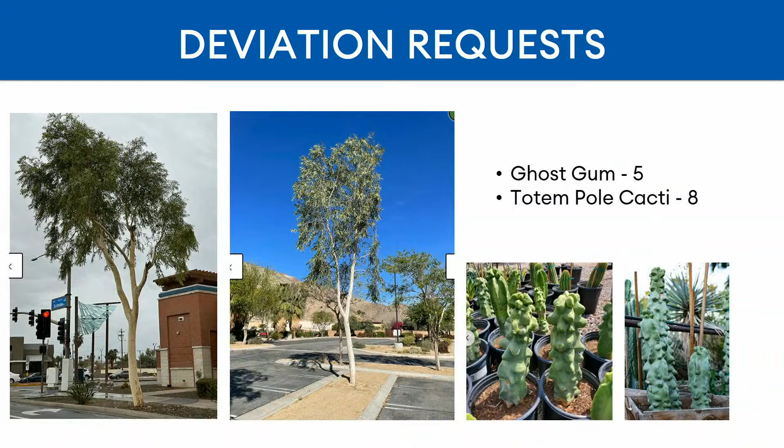So could we go back to the image of the ghost gum? Because that's, I think, why I'm not really a fan of them. And by the way, this is interesting because the town is exempt from their own zoning code, but they're going through this process, just so you know. They don't have to follow these rules. But the ghost gum tree to me isn't a really attractive tree. I don't feel like it has a good canopy, and I think the utilization of that space is to gather people, and it seems like that's where we'd want trees that create a shade canopy for heat relief. But I'm not going to care enough to object, but I just, in my mind, I think if we were going to put in new trees, we'd put in trees that had a bigger canopy.

Is it because of the adjacent building roof? What is the cause or reason? Chair Kendall, Commissioner Baugh, I don't have any further information. If I recall, I believe there's a canopy that's being installed.

That's true. So there is a canopy that's being installed, but this portion that the ghost gums are lining is a turf area, and there's also a water wall on the north side of it, where the ghost gums are. If the ghost gums are going to be lined by a turf area, then I would strongly echo what Commissioner Baugh was stating about planting a tree that does more of a canopy and offers more shade. Just because I feel like a Shamel ash or even a pistache or something that can grow tall and out would make a lot more sense on hot summer days if we're wanting to get as many days of use out of this park as we can each year. And that's my opinion.

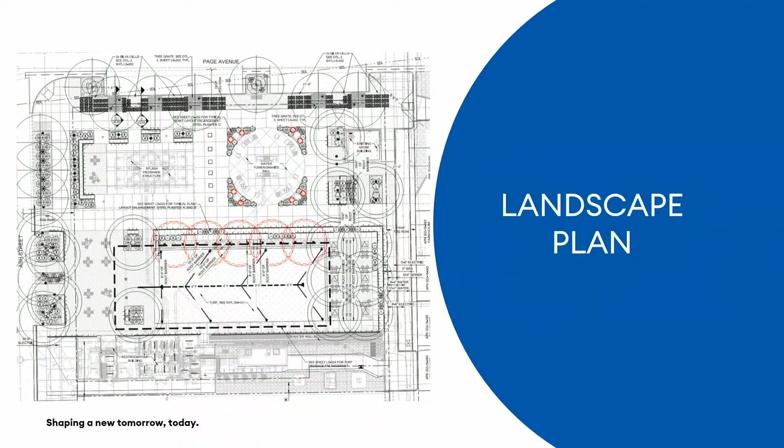I like that answer. I mean, I still like the shade, but that makes sense. Any additional questions or comments? I do have more comments. Are we at the comments part of this, or are we at the questions part of this? We're still at questions, sorry. Any additional questions?

Hearing none, I will close public hearing item DR 24-60, Water Tower Plaza landscaping, and we'll look for commission for discussion.

Commissioner Baugh, would you like to start? Yeah. I feel like it's a missed opportunity. We have this downtown area. We want to create vibrancy. We want people to walk around and hang out a little bit. And these trees just don't provide that type of shade canopy, which is really easy to deliver, I think.

I know if I was creating a project with outdoor areas, I think staff would tell me to put more shade tree plantings in them for the comfort of users so that they utilize that outdoor space intentionally. Do I care about 5 trees that much? I don't know if I really do, but I just feel like it's important to say if we're trying to create this outdoor area and walkability and leisure and comfort and draw people here, shade is one of the key things to do that in Arizona.